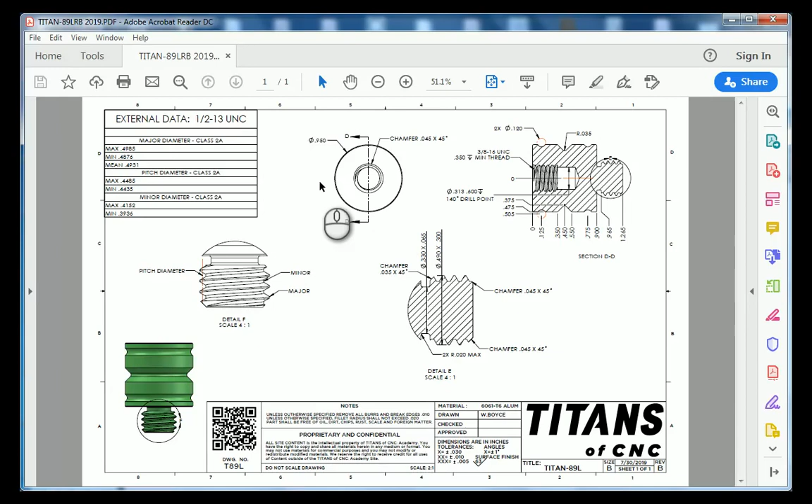All right, so let's dig into Fusion 360 and make this part.

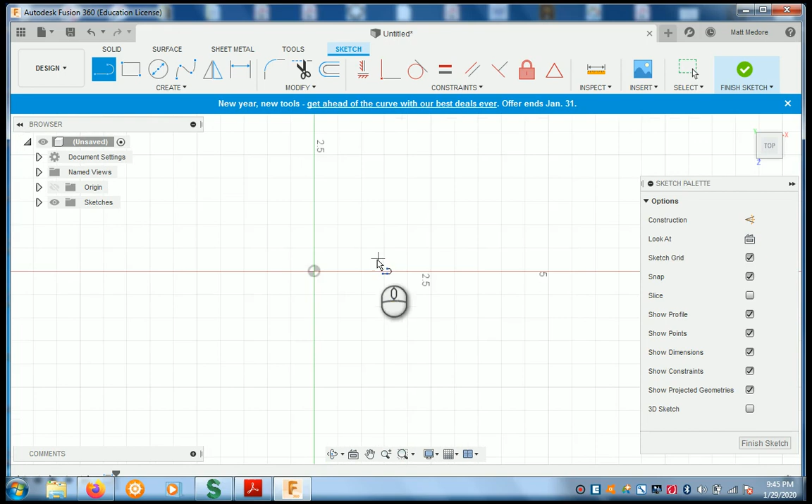So we're over here in Fusion 360, and we're going to create this part. This particular part, because it's a lathe part, we're going to start with some lines. We're going to go right down the center of our part and draw a horizontal line that needs to be 1 inch, 265 thousandths. We're going to use that 1 inch, 265 thousandths line to kind of anchor our part.

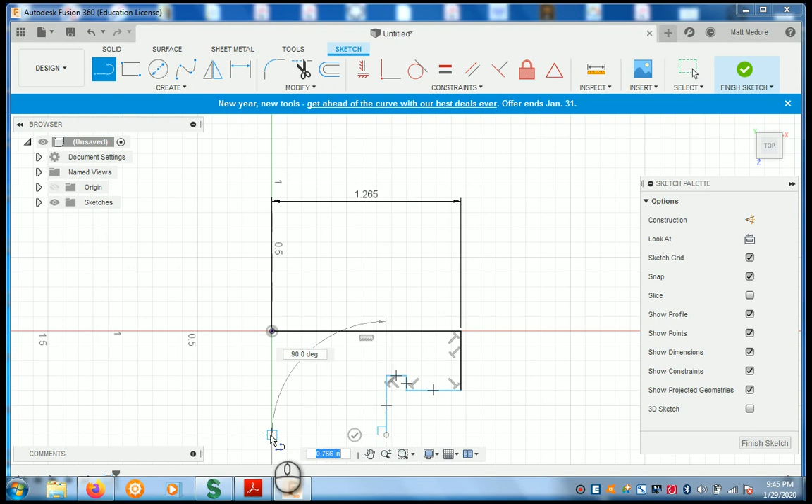The way I would draw this part is I'm going to just draw in some basic geometry. Here's our thread relief, and so this is kind of the outside of my part. From here I'm going to add that little V slot. And then I'm going to add my circles.

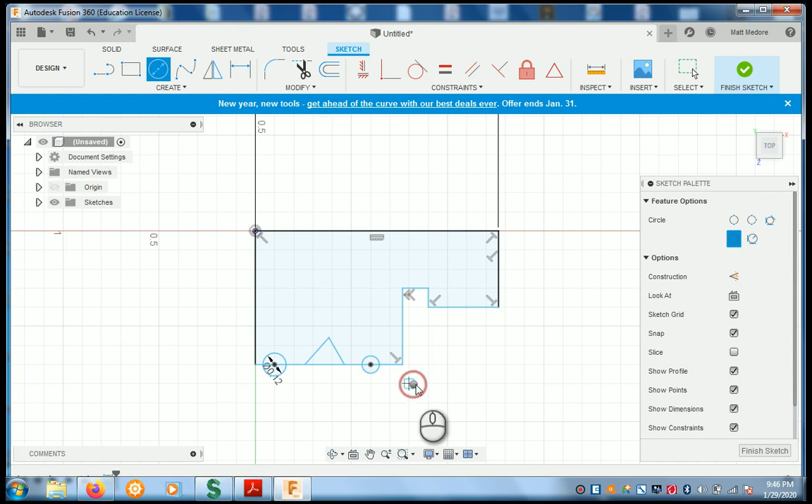Those circles needed to be 120 thousandths, so I'll dimension those right now. I'm going to dimension this circle like this, and I'm just going to copy that dimension using a variable. So we have our overall shape of our part.

We're just going to add some dimensions to it to kind of constrain it. So let's add those in right now. First one I'm going to do is the overall radius of our part. According to the print, the overall radius of our part needs to be 475 thousandths.

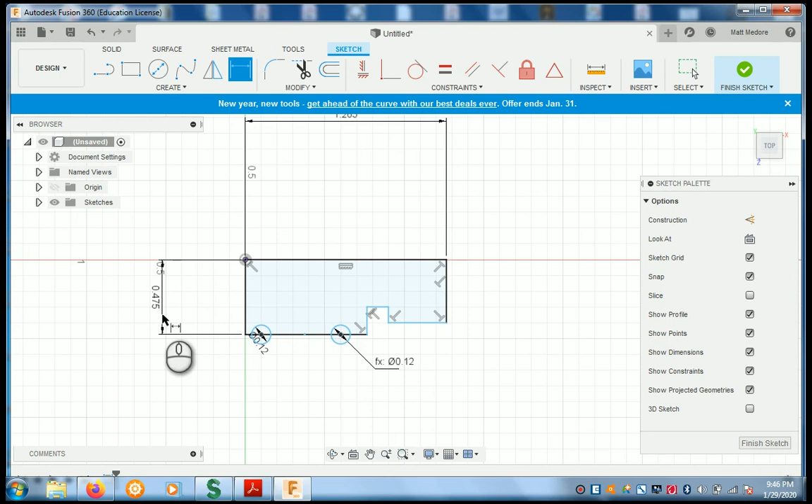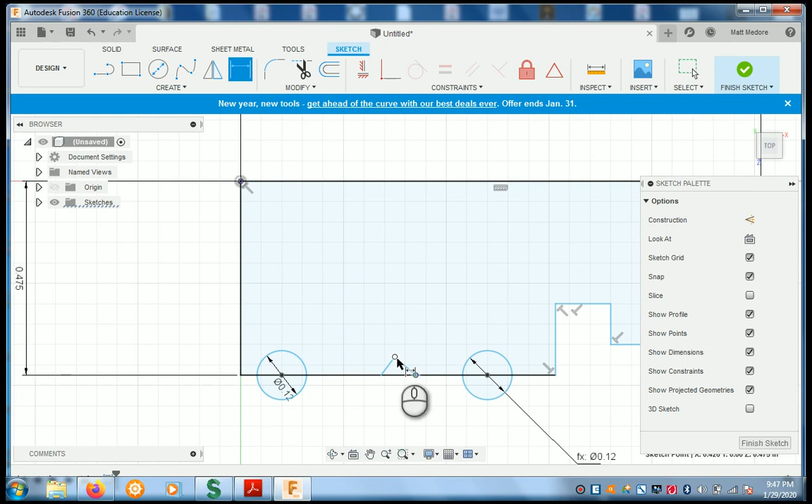Notice when I added that in, our little wedge down here kind of shrunk on us. That's all right, we're just going to grab these points. They're unconstrained right now, so we can just drag them around. It says the inside point is 375 thousandths, so I'm going to click on this point here and add that dimension in, 375.

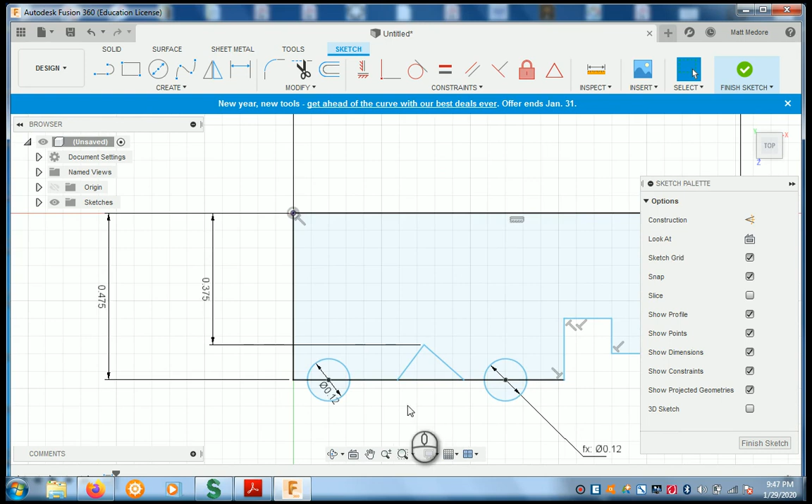I noticed something on the print that I should have caught earlier: the center of our circle here needs to be at 505 thousandths, so it's not actually anchored to this line. That's okay, so all we're going to do is click on the center of our part here and delete this coincident constraint. Once it's deleted, I can drag it off the part, and do the same thing over here, delete that coincident, drag it off the part.

With that in mind, I know that this center and this center are horizontal to each other, so I'm going to add that horizontal constraint in. And then I'm going to add my dimension in, 505 thousandths.

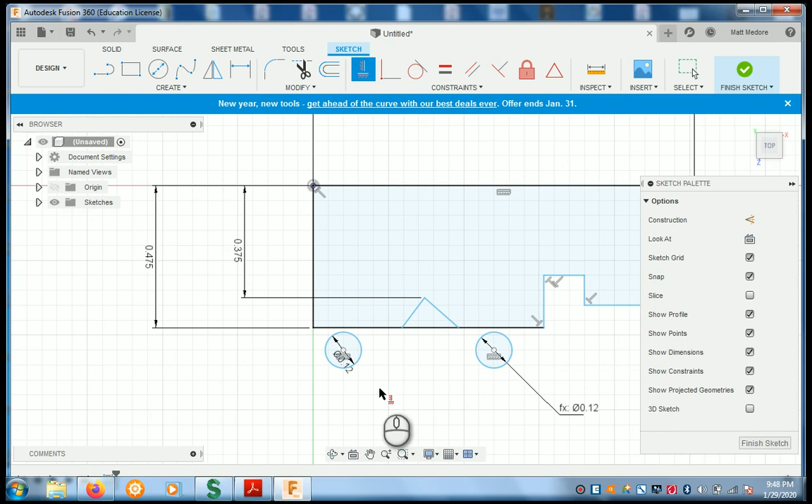Now we're going to add in our measurements over here too. So for our thread relief, it says that this dimension is 300 thousandths divided by 2 because it's a radial dimension. Outside of our major thread, or major diameter here, is 490, divide that by 2.

I'm going to clean up my measurements here. At any time you can drag your dimension and extension lines around and kind of organize your workspace. It's good to organize this stuff so you can see all the dimensions at a glance.

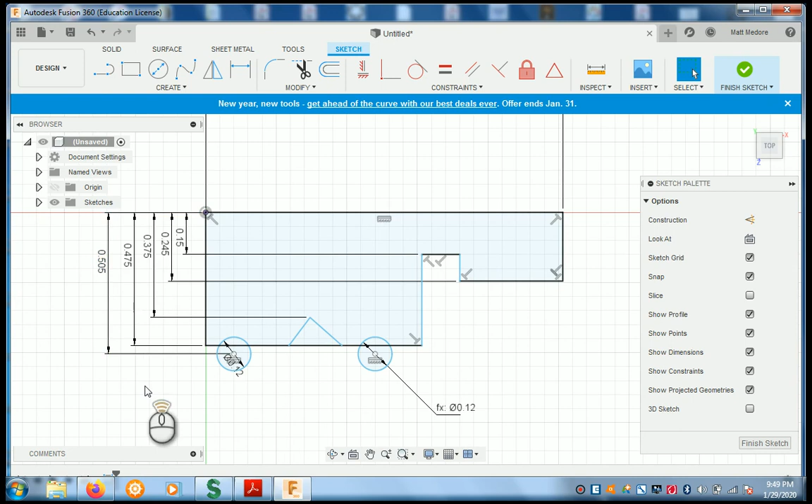Now that we've got our diameter measurements entered, we are going to enter our other dimensions. Coming right off the datum, we're going to find this first location. First location is at 125 thousandths. To the center of the point, 450. To the first location there, 350. To this location, 550.

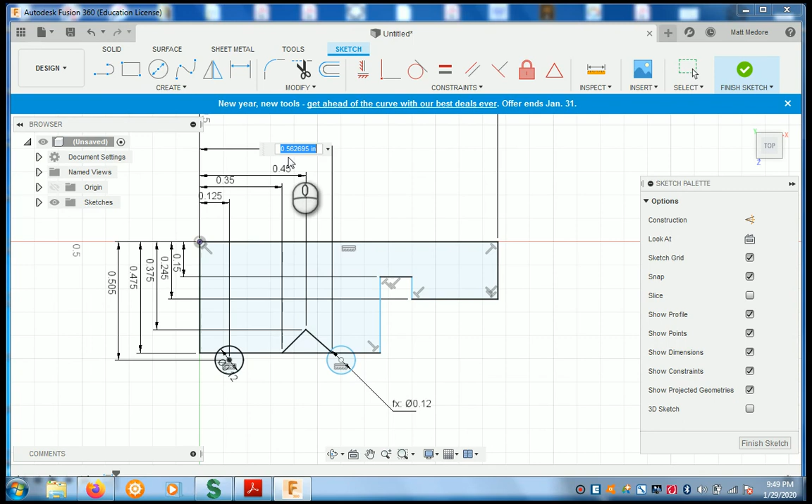To the center of this circle, 775. To the outside of our thread relief, 900. This thing got a little wonky on us, we're just going to drag that around.

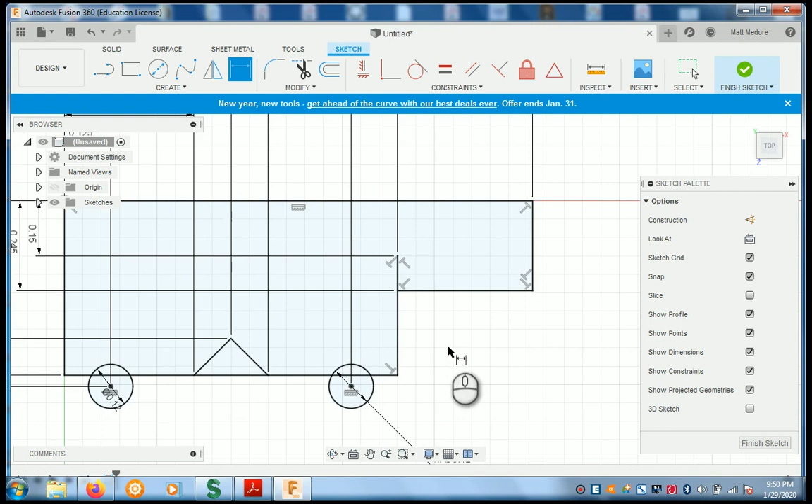And the back side of our threads at 965. Notice that our part is fully constrained, everything is black in color, and we're ready to revolve our part.

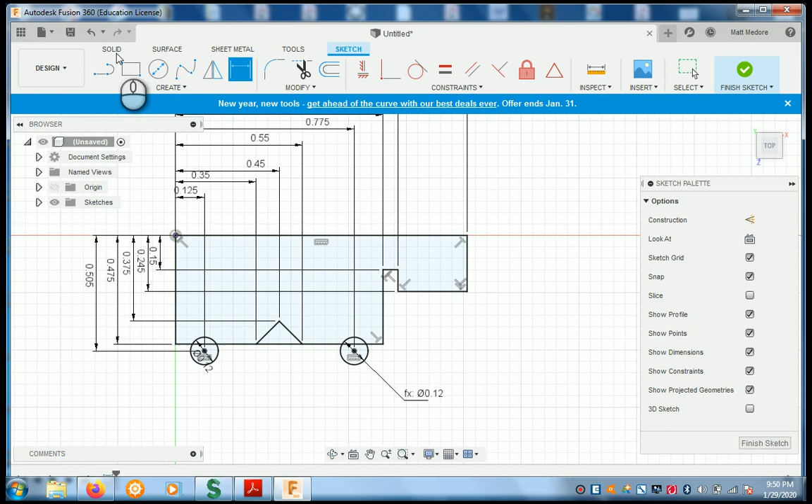We're going to go to Solid, down to Revolve. We're going to choose this geometry, excluding these circles and this little triangle here. So that's our profile, and here's our axis. We're going to orbit that part around, and that gives us our overall solid body.

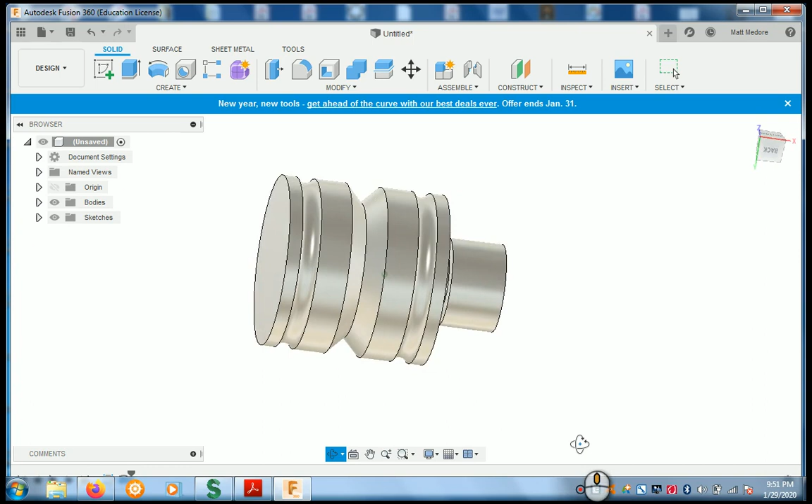Okay, so we're going to go in after the fact and add in some features that we missed. Modify down to Fillet. First thing we're going to do is click on this line running right down the V block, and we're going to radius that at 35 thousandths. I'm going to right click, repeat.

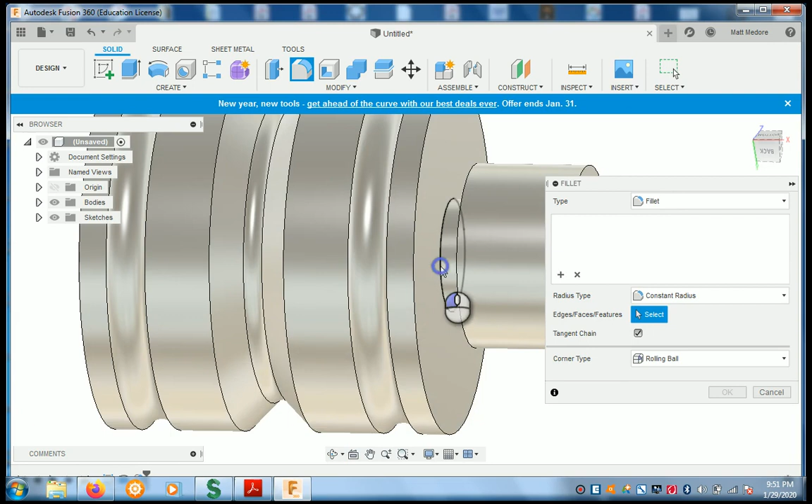We're going to add in our little corner fillet. This corner fillet is created by the parting or grooving tool that actually creates this feature, and according to the print, this cannot be any larger than 20 thousandths. So we added that in.

Now we're going to add our chamfers in, Modify down to Chamfer. Right click on that edge and that edge. According to the print, this needs to be 45 thousandths, typical, two times at 45 degrees. Right click, repeat. All right, chamfer the outside of our part.

And the outside of our part, we'll have to look at our notes down in the title block on this one, and it's indicating that this needs to be at 10 thousandths to break all sharp edges.

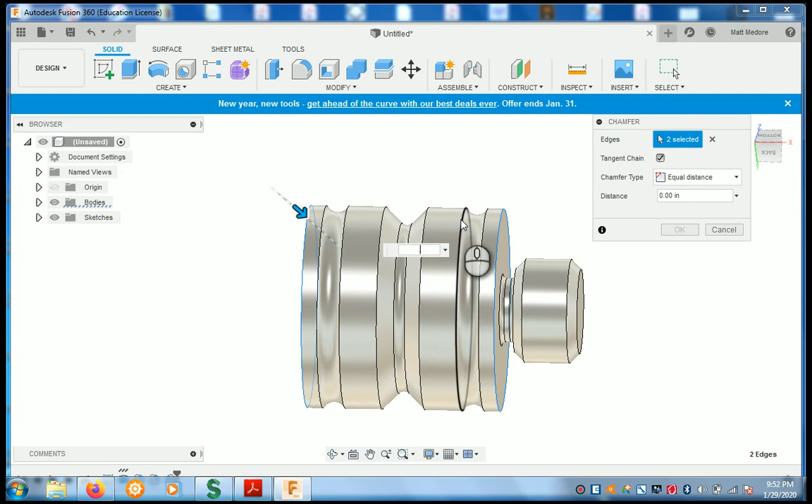We're going to put our threads on the shaft here. Create down to Thread. We're going to click on this, and we're going to go to Model Threads because I actually want to see what these threads look like. These particular threads are half 13.

So half, the decimal equivalent of half inch is 500 thousandths. Designation is 13. We're going to use class 2A. A indicates these are external threads, whereas B indicates they're internal threads. These are going to be right-hand threads. I'm going to press OK.

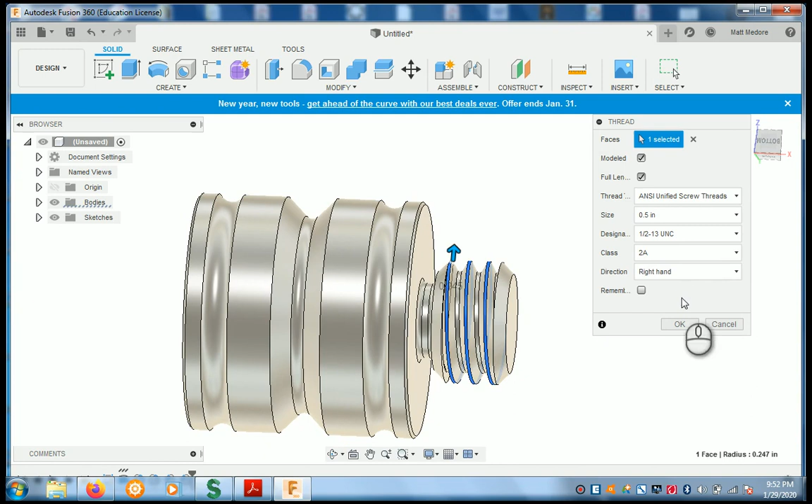Almost done with this part. Over here on this side, we have a tapped hole.

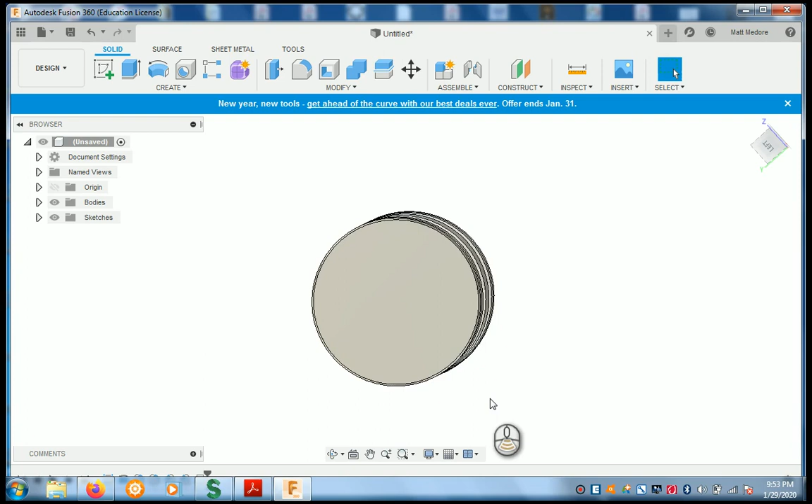So over here, there's a couple different ways to put this hole in here. I'm going to do it the quick and easy way. If we were actually making this part, we'd spend a little bit more time calculating the chamfer that needs to go in there for the leads on our threads, but we're just modeling this part, it doesn't need to be perfect. So what we're going to do is use our existing datum location, or our origin, to anchor our hole here.

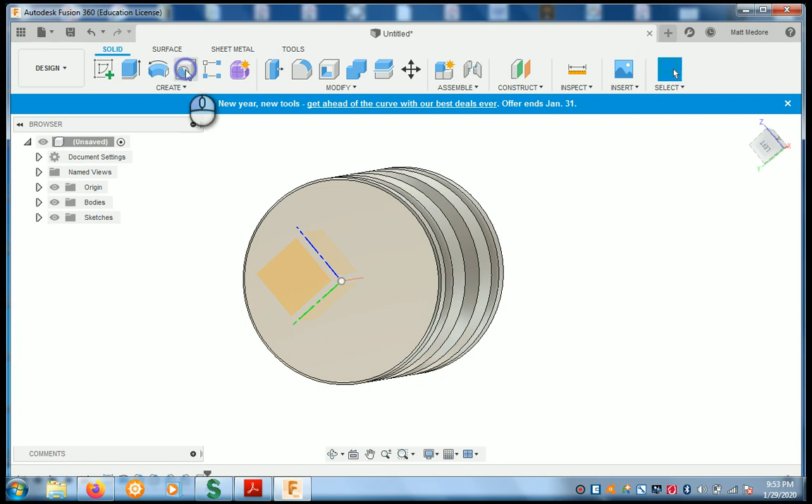So we're going to go up to Hole, and we're going to click on that datum location. Over here, we're going to be using a countersink hole because they are stating a chamfer on the outside diameter of this. It is going to be tapped with threads. Notice on the print they're indicating that the hole is going a little bit deeper, specifically 600 thousandths on the cylinder deep.

So we're going to use an offset thread. So we're going to start typing this data in here. So the overall length of our hole is 600 thousandths. The chamfer diameter, well, again, as I mentioned before, they're not giving us a diameter, they're just giving us a chamfer width on here. So if we were actually making this part, we would actually do some better calculations on this. I'm going to do some rough calculations.

What I'm going to do is, I know the decimal equivalent of our major diameter of our thread, which is 375 thousandths, and all I'm going to do is add 45 thousandths times 2 to it. So I'm going to add 0.045 times 2 in parentheses, just like that. And again, I don't know if this is 100% correct, but this will get us close for just a 3D model.

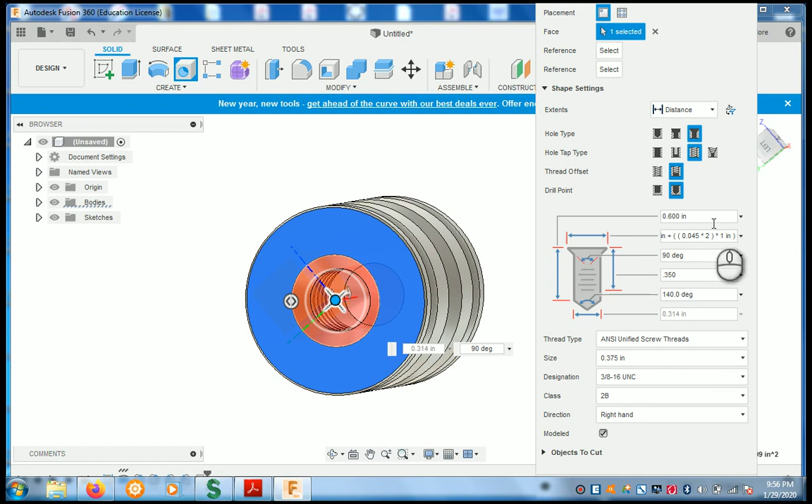Our thread needs to be 3/8. 3/8-16 is what our designation needs to be, in class 2B, and then, on this particular part, I wanted it to be modeled, so I'm going to hit enter on the keyboard. It's going to lock that into place. Then I'm going to turn my origin off.

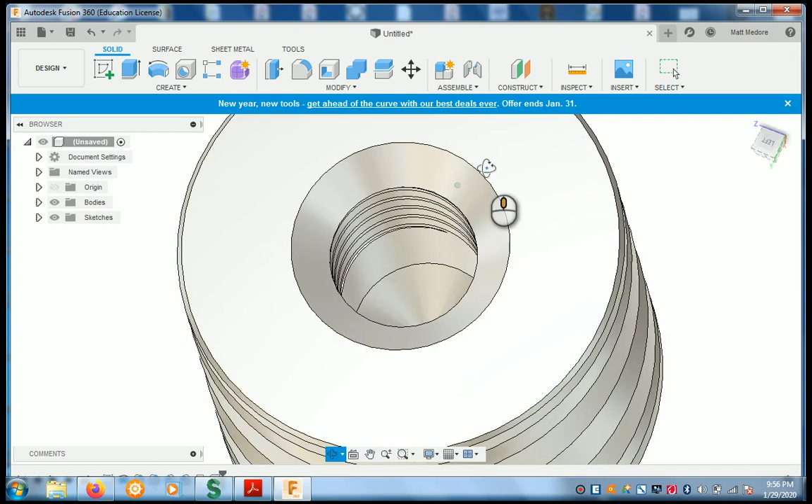So one thing I'm noticing right away is, just from experience, this chamfer is way too large here. Again, this is something where there are some rules of thumb that we use as machinists. Generally, you want to chamfer about 1.5 threads in, so I'd actually have to take some measurements on this. Ultimately, it's what the customer wants, and on a part like this, I'd actually possibly ask for some clarification on that. So, but other than that, this concludes how to draw the Titan 89L.